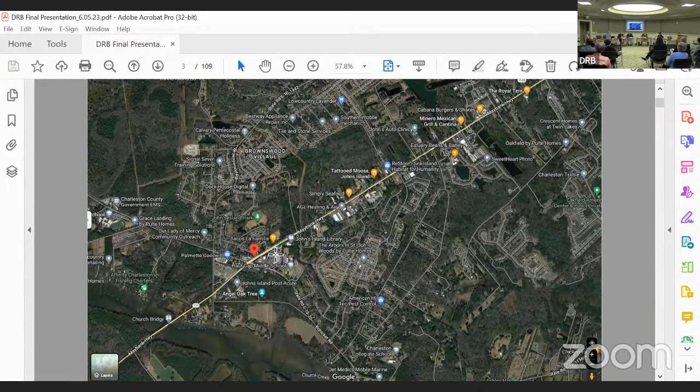Just a few slides, if I could direct your attention to the screen showing the location of the project. Just near the intersection of Main Road and Maybank Highway, 3588, right next to Sunrise Bistro. There's a closer view.

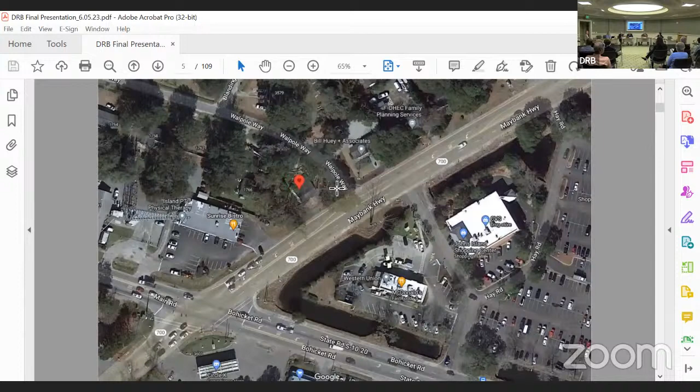A few more images when we actually start the presentation. With that, I'll turn it over to the applicant. You could just briefly speak on it. Oh, okay, all right, you had other slides to show. I was waiting. Yeah, thank David.

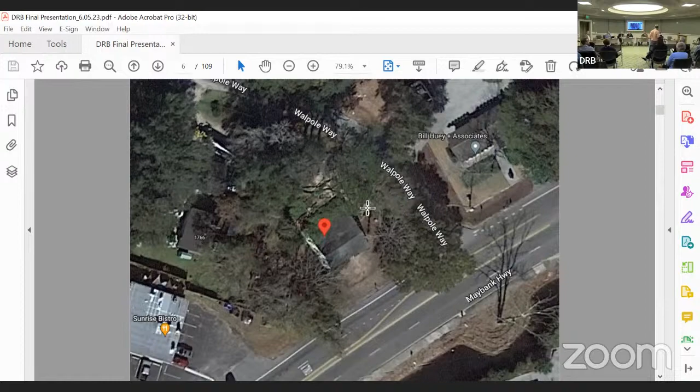I appreciate it. My name is George Grazzi. I live at 2485 Royal Oak Drive on Johns Island. I've lived there since 1990. I bought 3588 Maybank last January at a master of equity sale. It's been unoccupied since 2017. A Vietnamese family approached me about it. It runs a successful chain of nail salons, and that's what they want to put there. They've signed a long-term lease.

If we can get— sorry to interrupt, if you could just keep it to only the demolition and not what you're proposing to do with the building. Okay, thank you. Actually, I don't have a whole lot. So basically, we've been working with Stan Tech, Ron Gessen Architects, and David Hatcher Engineering. We designed the building, and we were trying to maintain the front and the 2 sides. But when we got all the covering taken off, we found out that all the base plates and lower parts of the 2x4s were decayed, and we were trying to build it back better with new materials. I've got my contractor and his foreman here to validate what they found when they began the demolition. We are now dead in the water once again, and we would just appreciate you agreeing to let us build this as planned.

Great. Did I miss anything? Anybody else like to speak on it?

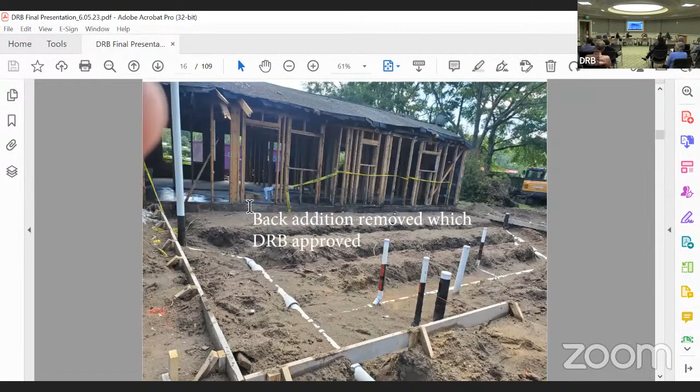And then we'll resend that — some of the exterior materials were removed. And then this back portion to the left was a newer addition, so that did allow the demo of that portion of the building, since it's not — DRB reviewed and approved that addition that was allowed to be removed.

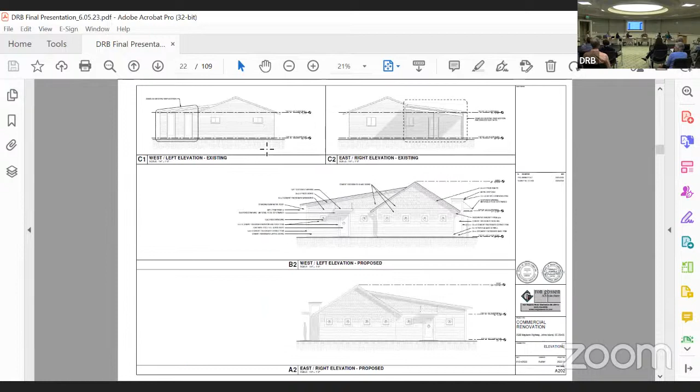Current condition of the house. Are there any questions from the board?

Is there anyone here from the public that would like to speak? Yes, ma'am. Anyone else? Just one? Come on up, please. Yeah, that'd be great.

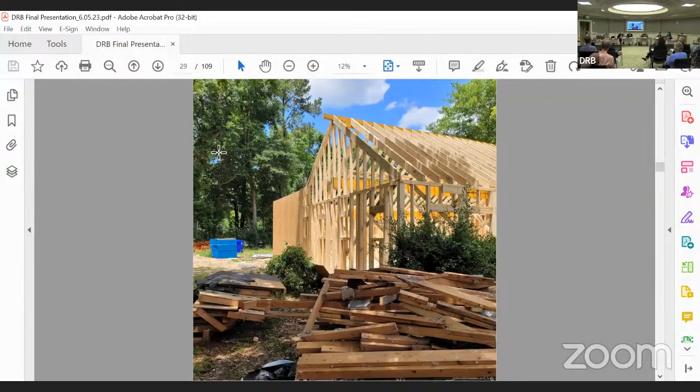So basically, the size of the project falls within the staff review jurisdiction. We would not have seen that coming up. Correct, I forgot to mention that because the renovation was under 3,000 square feet, it was not required to come before the board initially.

And there was, if I remember, based upon the review that I saw, it appeared that notes on demo were somewhat spread throughout the documents. There was no demo plan, as you had indicated as well. And I guess the only other question that I have is, as far as the options of the board, obviously if it's approved, it remains the same. If there's a denial, what are we asking the applicant to do then?

I would ask that we have some advice. I'm sorry, I didn't hear the question. The question was, understanding the results of an approval, but if the application is denied, what are we asking the applicant to do? I don't know, that's why we're asking the attorney. I'm happy to give you some advice on the interpretation of the code in executive session if you'd like to do that.

Can we make a motion to move to executive session? Second. Is there a motion, second? Yes. Any further discussion? Stephanie, do you vote to move to executive session? Ashley, Aaron? Yes. And yes. I'll say yes. We can step out and leave. We'll take a brief moment to enter into executive session and we will return shortly.

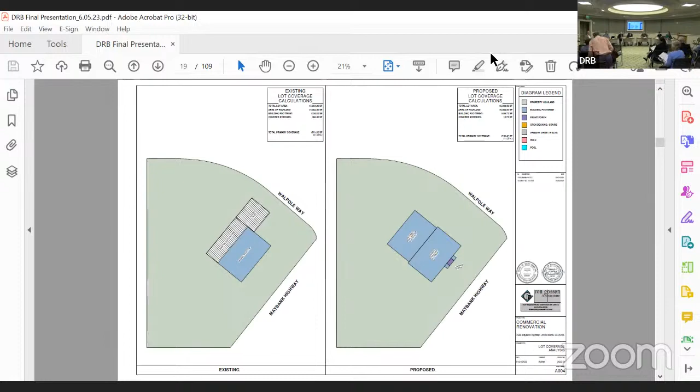Very much. We are moving on to agenda item number 2, 2015 Battery Boulevard, requesting preliminary approval for a new fire station number 23.

Actually, I think we've seen this before. So, turn it over to the applicant, and all set. Thanks, David. Okay, yeah, we'll do that.

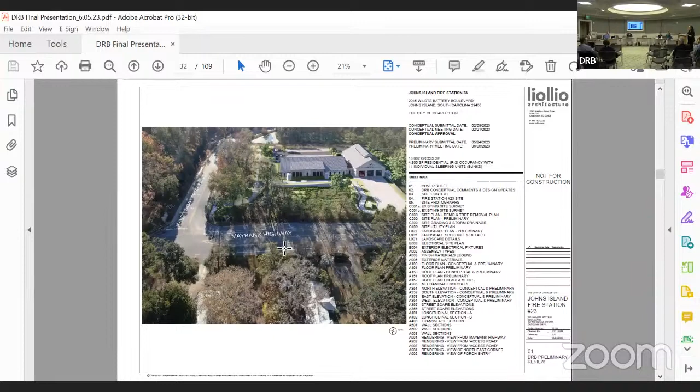It's good to be here in person. When we did the conceptual application, we were in the Zoom room, so we're glad to be back for preliminary. I'm Jennifer Charzuski, I'm a principal with Liollio Architecture. Here with us today is Jeremy Eaton from the design team, David Likey, the landscape architect, to help with questions, and Beth Garland from the City of Charleston as the owner's rep. So we'll go forward, David, to just address — we appreciated the board's thoughtful comments on the conceptual application that really focused on the roof overhangs and achieving more clarity and simplification of that.

And there was some discussion about the brick bonding pattern, which we put our design updates in there to say that we concurred and have simplified and unified the overhangs now on all parts of the building. They're the same depth. We've been able to structure them differently to really maximize the thinness of the roof, minimize the thickness, and to have a consistent language without the exposed rafter tails. And then we'll talk about the brick bonding pattern, I think, as we go through the renderings.

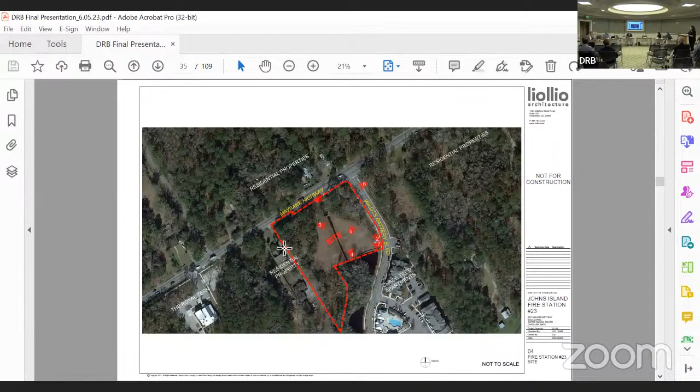So we'll just move quickly through this since you've seen it before, but it's on Johns Island with Maybank Highway frontage next, and there is an existing drainage pattern running through the site. The site clearing, some tree removal, and wetlands remediation was done as part of the PUD prior to the city purchasing the property. There are some photos which are unchanged from conceptual.

I think just one thing to point out to reorient everyone to the site plan: the building has frontage on Maybank Highway, and that's where the emergency apparatus exit will be out of the fire station bay. The rest of the frontage is a protected wetland area, so the building is set back behind that. And the building really has two fronts, because to the south of the building, as part of this project, will be a public access easement to help set up for the future of a public street. And that is where the pedestrian and vehicular entries will come from to the building.

Stormwater is a challenge, of course, so we'll make use of subsurface stormwater storage both beneath the parking lot and on the east side of the site, as well as some pretty visible large-scale cisterns for pulling water off of the roofs.

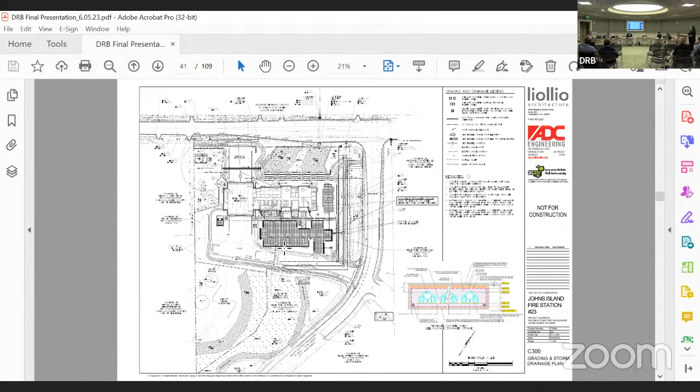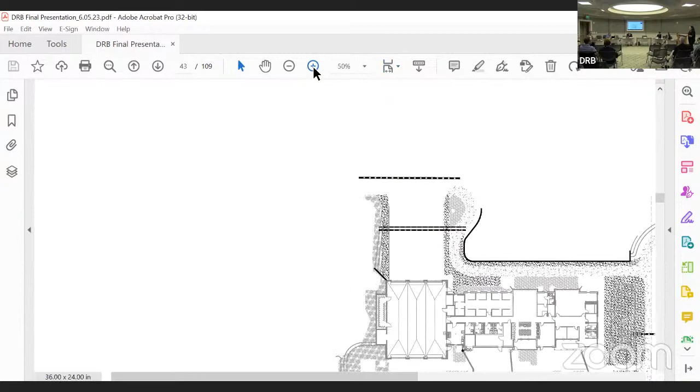There you see the diagrams for the subsurface storage, and I guess we'll maybe just skip to the landscape plan. There is a tree mitigation diagram in the package as well. The tree mitigation is going to be a combination of on-site plantings as well as paying into the tree bank, just due to the constraints of the site. I think just the note we wanted to make on landscape is that obviously that large tree, it's a 111 DBH combination, is a significant feature of the site, as well as the wetlands on the frontage. It's really part of the character of Maybank Highway and being preserved.

The landscaping going in as part of this project is meant by design to be simple and clean, setting it up for success. As you may or may not know, the firefighters themselves maintain their site, the City Parks Department does not do that. So really working to have simple bed lines, consolidated turf areas, durable plants that can be kept organized, knowing that reality.

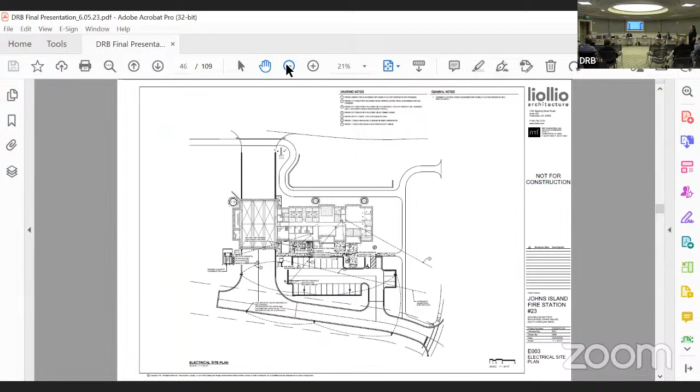There is a site electrical plan. The site lighting will be leased by Berkeley Electric, but the photometrics will be available at a future date once they've done their design. But we did highlight the building mounted exterior fixture, just looking for something very simple and quiet.

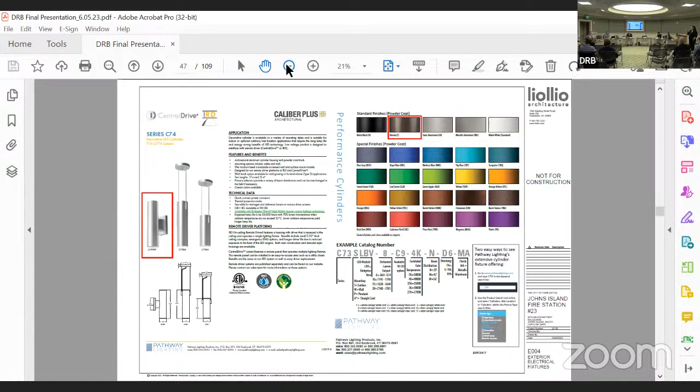We included in the package the wall and roof assemblies, but what they show is the exterior veneer is all brick, and the roof is predominantly, if you go forward, standing seam metal roof with an area of low slope membrane roof. We included the finish legend to help key back to the elevations. These are the same materials that you saw at conceptual, and we have the physical box here if you want to see them in person.

Now that we're in person, the field brick is in the upper left, and it's a gray body brick with a white slurry coating on it. The accent brick is the darker one, so it's the same body color but without the white slurry. The use of wood is very specific and limited to the framing around the screen porch and a mechanical screen enclosure. I think we're still selecting mortar colors, and then the storefront and painted steel accents are a dark bronze color.

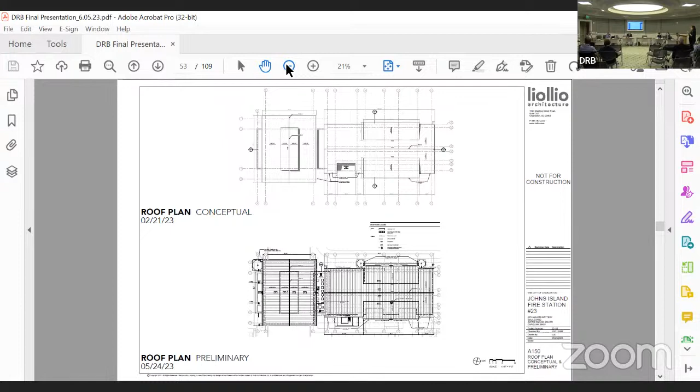You can see that the hyphen roof does have small condensing units. These are residential scale kind of split system units, and there is a mechanical screen wall shown for both of those on the roof. You can also see here the 3 large cisterns that front Maybank Highway.

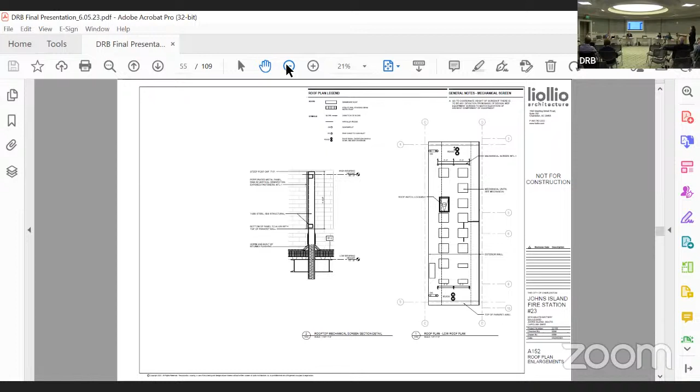Screen wall details: the hyphen roof screen is a perforated rimmed panel, and the at-grade screen wall is wood.

I think all that's left are the building elevations. We have previous and new, so other than turning off the sun and removing the shadows, the only change you see here is in the cisterns, where we went from one large one to two, to really just pick up the roof areas better. On the next elevation, you see the change in cleaning up the roof line for that mechanical purpose, but no other significant changes.

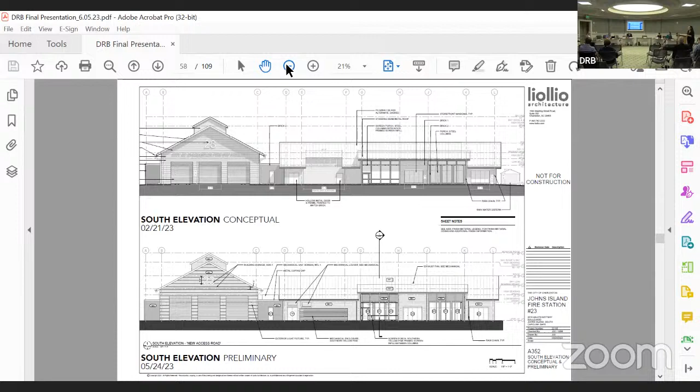And on the east and west, we'll click through the streetscape elevations and come back to those if there's any questions.

The building sections, for reference, there was a question about the conceptual light monitor translating to the inside of the apparatus bay, which it will do. After those, we'll click through these.

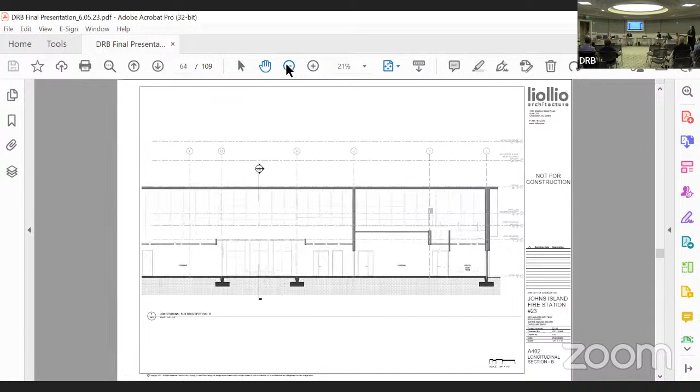Keep going. The wall sections will show the brick veneer and the square cut overhang detail, and the way we're changing the structure to really get it as thin as possible. I think it's a 6-inch thickness, and it's a 30-inch overhang.

At the apparatus bay, we're doing the shadow line every 9th course, I think. When you saw it at conceptual, it was every 6th course — it was denser, and there was a request by the board to study the coursing between the two buildings. So we wanted to provide clarity that all the light colored brick is the garden bond coursing. It's the same coursing, but it's only the apparatus bay with the shadow line protrusion. That came from a desire from city leadership to have a distinguishing feature. When we studied adding it to the other building, it was really busy since that building has a different scale of things happening on it.

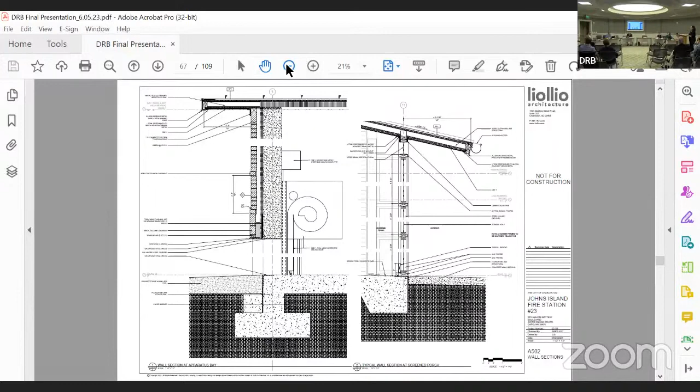So with that, I think we can click through elevations to the rendering. So the point we made again at conceptual is all the vegetation in the wetlands is not shown here for clarity — just the one grand tree is — but obviously it's very densely vegetated.

The public way sidewalk comes around the sign. That was made a little more gracious and curvilinear based on input from the mayor's office.

This is the other front of the building. It has two fronts, so we think that cleaning up the roof line helps focus on the pop out, which is the screen porch and the public entry.

And then there is a bid alternate for a photovoltaic array, and sadly it probably won't be that big because there are some limits, especially electric, on how much capacity you have. I'm willing to show that as a possibility.

And then you see here the way the cisterns are connecting to the two roof lines, and you can kind of see the expression of the garden bond pattern, as well as the low retaining wall between the sidewalk and the wetlands.

And then lastly, we've simplified some of the structural detailing at the entry, and you can also see the use of rain chains on the south side of the building. That was less than 10 minutes. I'm happy to answer questions.

Thank you. Are there any questions?

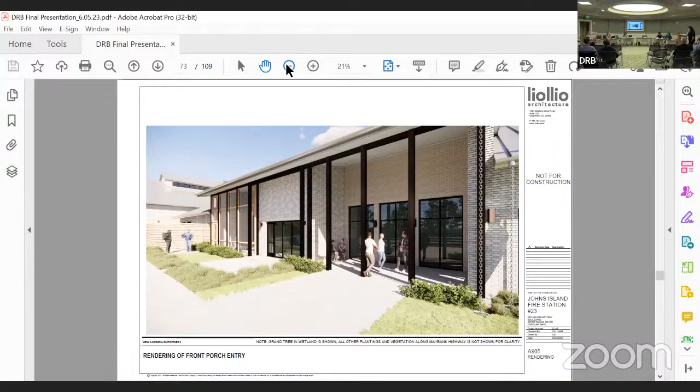I have a couple questions, and I wasn't here for the conceptual review, so apologies — I'm catching up a little bit. But in that front area, I see where the wetland is, and then there's the large wetland buffer area. Is that also remaining undisturbed from a landscape perspective? Yes. Okay, so just keeping the existing plants.

And then the retaining wall that runs along the back of that, what material is that proposed to be? Proposed to be cast in place concrete. Okay.

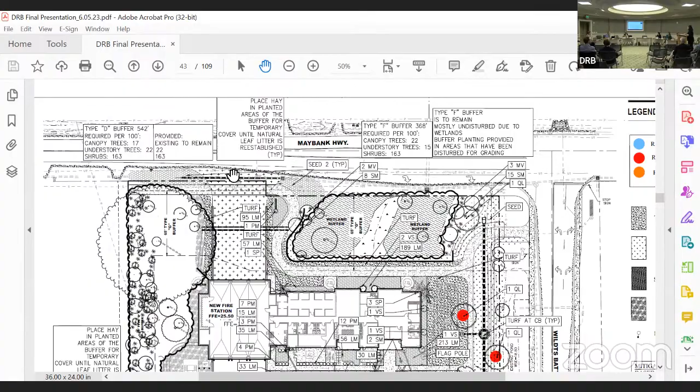And the last question I had about the landscape plan, where you have what looks like a large generator and something else in there, I can't read the note. It's just labeled as exposed mulch in that whole area. Is that the intention, that it's not going to be planted? Just an open mulched area?

Yeah, there's a note about letting the forest floor litter return, putting in some mulching until that has a chance to return. But David has a better answer. That was the design intent.

But even in the area where there aren't any trees or anything proposed? As far as the generator, just around that, there's a large area that's just labeled as exposed mulch. Yeah, we've gone back and forth on that. There's going to be a lot of activity around the backside of that. We want to screen, of course, toward the other front of the building, but felt that it's backdropped by the existing vegetation, and really didn't require that.

Yeah, you hit the nail on the head with the access. They really need access to all sides of the generator. They have to do regular testing. They store diesel fuel in the tank, so they also draw on that in emergencies as well as for regular maintenance. So planting can kind of get trampled.

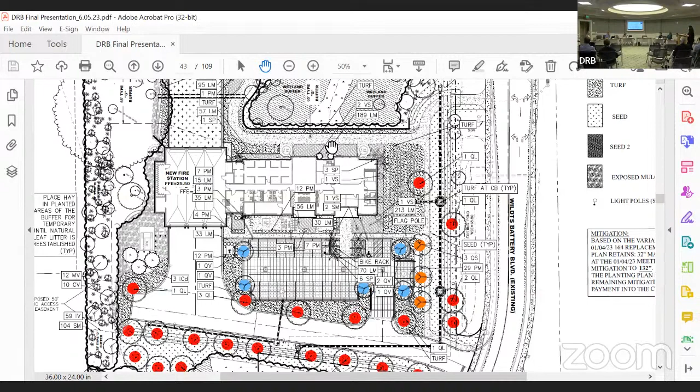Any additional questions? I had one question. The mechanical well, I know that it's come out outside of the building. Is that because stuff couldn't fit in there, the mechanical equipment couldn't fit in?

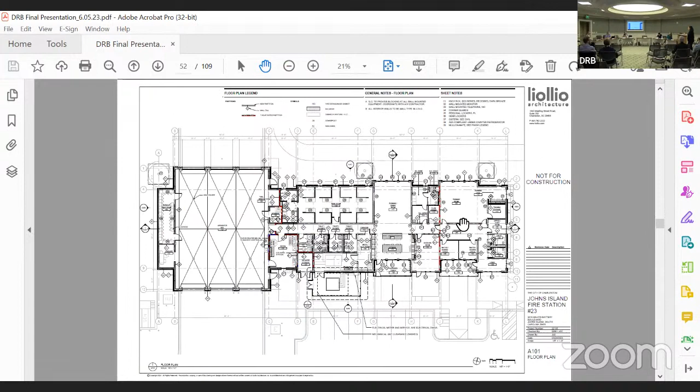It's both, yeah. The dedicated outdoor air unit was too big to go on the roof, and we ended up splitting it partially because it would have been a much bigger screened enclosure. But by putting the air handling part in the building, it extends the life of it, and we don't have ductwork going into the building, so we're able to keep just the condensing unit outside.

But the condensing unit for that dedicated outdoor air unit is big. And we looked at a lot of places on site, and there's no other good spot. It just feels right there. So we tried to make it kind of a quiet bed. Felt that it was quieter this way, but it wouldn't have fit in the recessed option because that would have been the whole unit.

Any additional questions?

Is there anyone here from the public that would like to speak on this application? With none, David, staff comments, please. Thank you.

Staff comments have been addressed since the last board meeting. One staff comment: the city planning department is still wanting to see an additional sidewalk or boardwalk along Maybank Highway. The applicants have stated that the city will not pay for the walk, and that would need to encroach into the wetland a few feet. Staff recommends that the walk still be installed. I was asked to put this comment in to see if we can get any additional consideration, hoping that the city may change their mind and pay for that sidewalk. So that's all I have for staff comments.

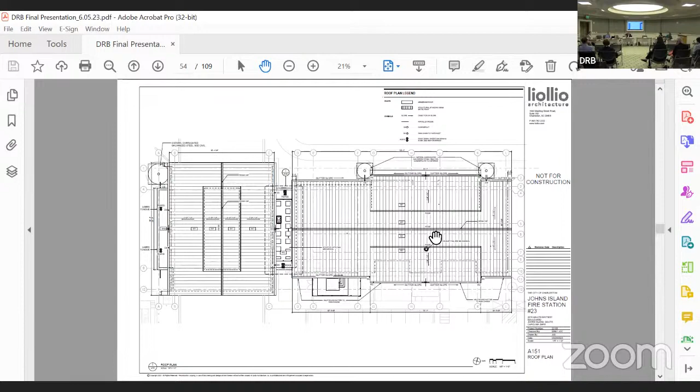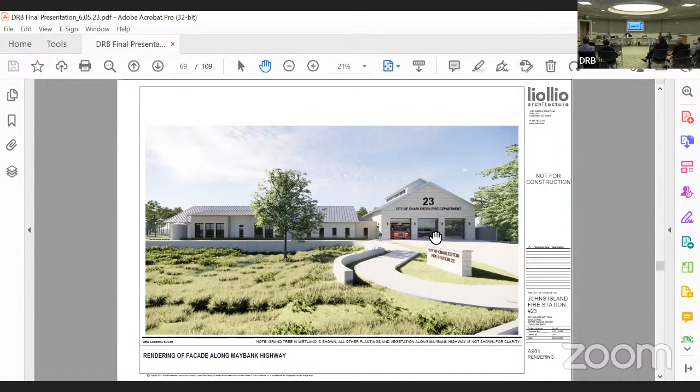My only comment, architecturally, I think it's a beautiful building. Height, scale, mass, we know that fits in, but I'll applaud you. I think the quality of the presentation at this stage is what I'd like to see in a lot of these. The only negative is that mechanical screen. To me it kind of ruins the screen porch idea, because you're right next to a mechanical screen with mechanical units in it, and you've got a screen porch right next to it. But I understand why you did that. Architecturally, I see nothing else to comment on.

I have a staff comment or architectural comment: I think it'd be a great addition to the site. As far as the sidewalk, I think the sidewalk is fine. But that's my only comment.

Additional comment to add? No, I would not add. I did have one quick question before we make a motion: where are you in the TRC process? I can see that the sidewalk is maybe unresolved with the city and TRC. We've done a TRC pre-application a while ago, and we're due to make the TRC first submittal in a few weeks, because we're at the early CD stage of the project.

Any other questions or motion? I'll make a motion for preliminary approval, with board comment to study the area specifically around the generator, soften that landscape approach, study areas with turf, seed, and mulch, and study loosening the landscape design approach overall. Does that sound right? Are you going to ask staff to comment? I was not going to.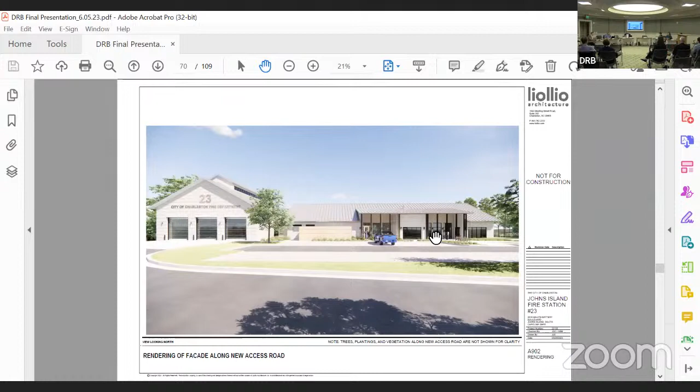I'll second the motion. We have a motion for preliminary approval with board comments: one, study the area around the generator to soften the landscape approach; two, study areas with turf, seed, and mulch; three, study loosening the overall landscape approach. Is there a second? Second. Any further discussion? Stephanie? Yes. Ashley? Yes. And I'm also yes in favor. Thank you.

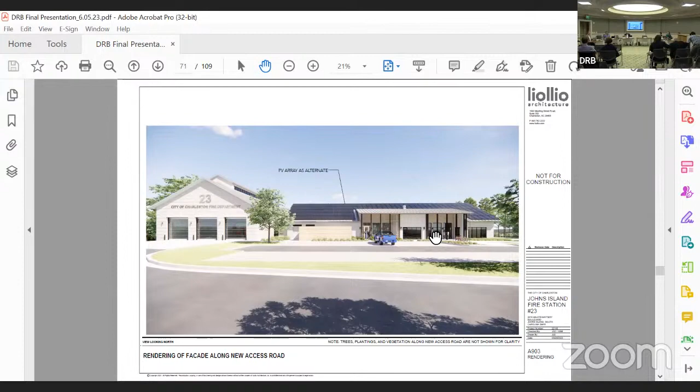We will now move on to agenda item number 3, 1859 Sam Rittenberg Boulevard, requesting conceptual approval for a new Tommy's Car Wash.

I've got just a few context slides first. If I could direct your attention to the screen, showing you the location of the project. Do we need to grab Dino's and Andy? Oh, yeah. Good night. Night. Thank you.

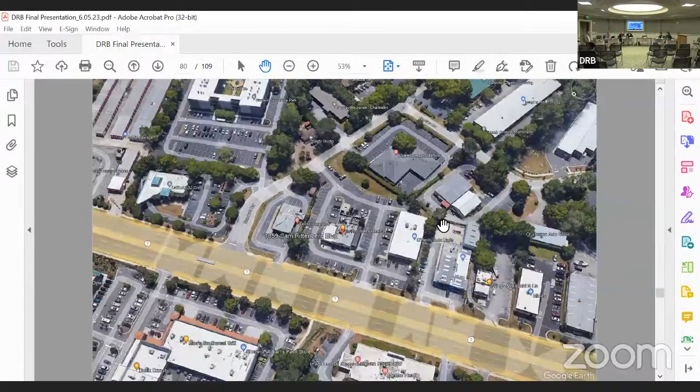Good evening, thanks everyone for your time. My name is Paul Waller, I'm with Bowman Consulting, civil engineering firm on this project. Also introducing some of the ownership team and the Tommy's corporate team to dive into more of the specifics. My goal is to go through the first couple slides of our submittal package, hit the site existing conditions, site and landscape, and then turn it over to the ownership team to dive into the specifics of the building, given the car wash use. The building is a big component of it, so let them take over that part. Yeah, we can go ahead. Let me know when you go ahead to the next one.

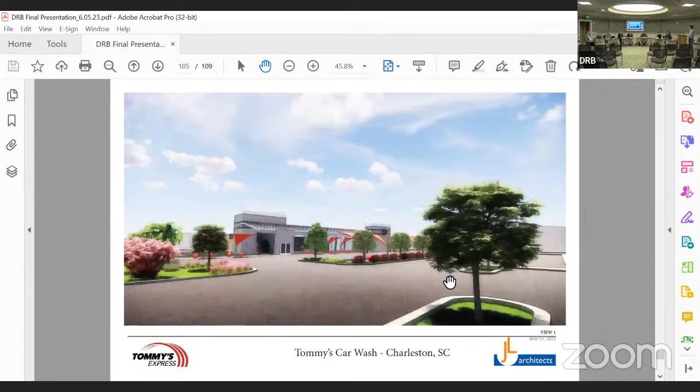The architect is not here, the designer, okay. Yeah, so the architect of record is not here. But I can speak to some of the elements of the elevations, just very briefly. I'm sorry, go right ahead.

We've been meeting with staff, I'd say probably for the last 6 to 9 months on this project, and we've had a lot of iterations. What we presented in this submittal package is a full brick building with a lighter gray. The colors have changed quite a bit over this one. That's something we feel we've been able to focus on.

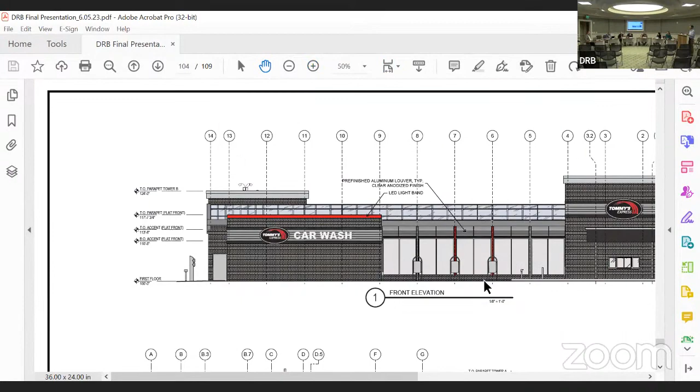Are the colors for this, given the car wash use, just the system of it? The colors along the front - they are a lot more grayscale than this one. There's typically...

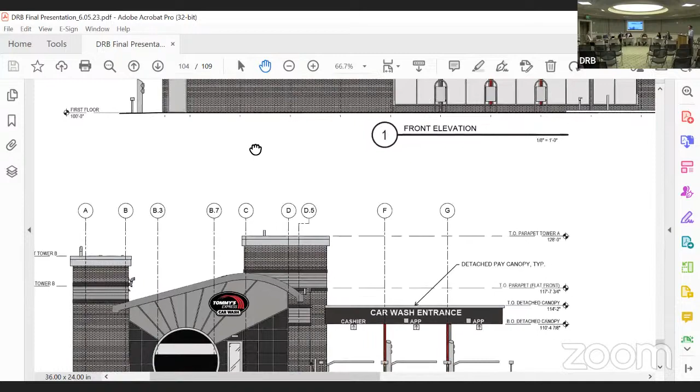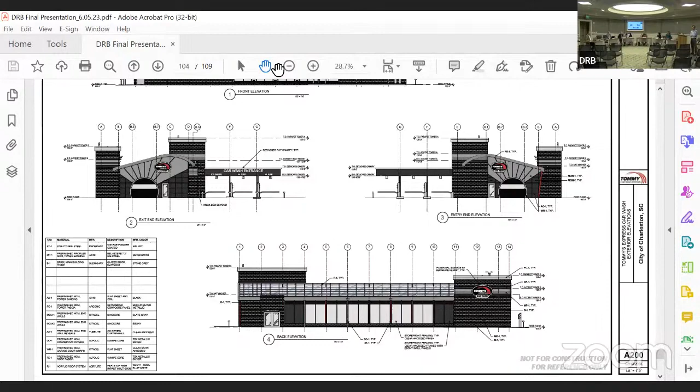I'm happy to talk to you. Are you familiar with the West Ashley Revitalization Commission's recommendations as far as the evolution of design in the West Ashley area? Okay, is this a prototype? Yes, it's not - this has been revised specific for this project.

And when I ask that question, I mean as far as the design, the elevations, and everything - this is different than anything that y'all have basically done, is what you're telling me.

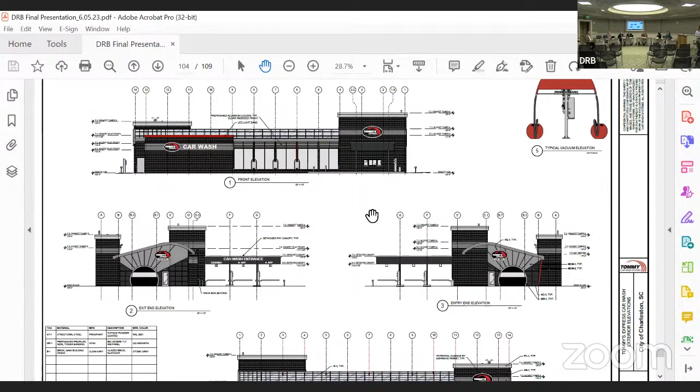As far as like, there's some things in the facility that have - like where a cashier stands, it's on the right side, it's like a pay window. That's where the cashier works from, so that area of proximity has to be by the loading area of the car wash. On the left side, you see this chunk. I don't think he means from an operational standpoint, but from an architectural standpoint, building design - that's what I was asking.

Does this look like the one in Michigan or whatever other location you're asking about? Yeah, substantially customized - we've never done this particular exterior elevation.

This was designed by the local team to meet your local feel. Could you maybe point out to us some of the changes that were made based on the context, or how you responded to the local context? I just think that would help us understand.

This has been something we try to do in all of our markets. There are certain operational standards that are design standards - as far as the actual facade and some of the materials used, we can adapt those. But as far as the look of the footprint of the building, that's the tunnel, right? The way the curb and lane is built is for safety for our employees and customers, so we don't want to mess with those things. As far as the facade, as Paul mentioned, we've been doing this stuff about 10 months now with David and the team. This is the basic footprint we've done before with different materials - completely different materials. We've also workshopped a completely different idea that's really never been done. If you want to see that as well, we can show you that.

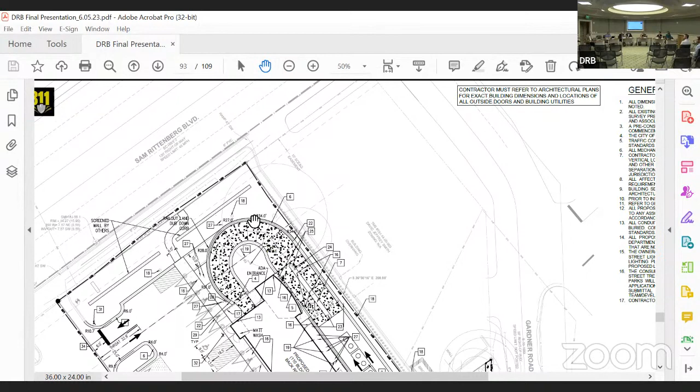Staff comment number 3, the drive aisle that is close to the large 34-inch caliper gum tree is in the drip line of the tree and will need to be shifted so it no longer is in that drip line. I spoke with Eric Schultz at TRC this morning, and he has relayed to the applicant the need to move this drive. So this is the gum tree right here, you can see the trunk, and how close the curb is. Currently this tree is within its own island. Eric said he's giving instructions to the applicant about removing the asphalt around it, creating space for that particular tree. So that will need to be shifted for TRC.

But unfortunately, staff does recommend denial. Staff cannot support this. Thanks, David.

Does the applicant team have anything they'd like to respond to or clarify?

One thing I would like to mention, I'm not sure how familiar you are with this process, but we are simply voting on the design. We're not voting, and we have no say or opinion over the use. So it's not that we don't support the project, it's purely a design standpoint, just to make that clear. But if you have anything you'd like to clarify or respond to, by all means, this is your time.

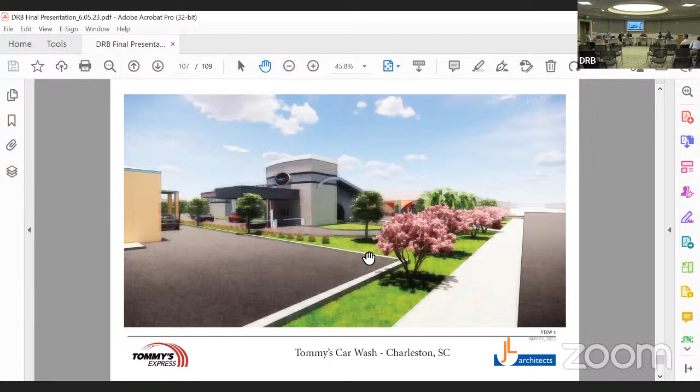Sure. I'll respond to a couple of the site elements that David spoke about.

So the screen wall, we are proposing that as part of this project. We just called it out on the screen wall right now. Our thought was that we would figure out the material through this process, figure out what the building actually looks like, and then present that detail as part of a subsequent submittal.

And then the circulation comment - David, do you want to pull up the site plan to talk through those 3 driveways. There's one existing access on Sam Rittenberg Boulevard that we will be utilizing, and there's an existing access on Gardner Road that ties into DOT right of way. Then interior of the site, there are 2 access points at the back of the installer area to essentially get customers in and out.

And yes, we are working with TRC staff. We've been through 2 rounds of comments with TRC, and the latest landscape comments did identify this week an issue on the northeast property line. Our arborist, Luker, had identified it as a grand tree, so we are looking into that with the tree and trying to see if it's safe. But that is something we are looking into.

And I would just say too, we also wanted to brainstorm. We know the prototype is a big issue, so we wanted some thoughts on how to de-prototype it. As you know, there are certain restrictions that we're under, but we think especially for this stretch of highway, this will be about a $6 million project and improvement to the area.

The building's built to be LEED certified. We reclaim the majority of the water that we use. It's a really expensive project, especially for that area, that will greatly beautify that stretch of highway. So we want to make sure we're doing it in a way that we can get support. But what's difficult is the prototype is kind of a subjective term, so we'd love to get some feedback from you all on how we can make this not a prototype and something you'd be able to more actively support.

I have a question. Have you studied any of the other car washes in the West Ashley area, and what the prototype was comparatively speaking to what was designed, permitted, and built? More than the recent ones, obviously.

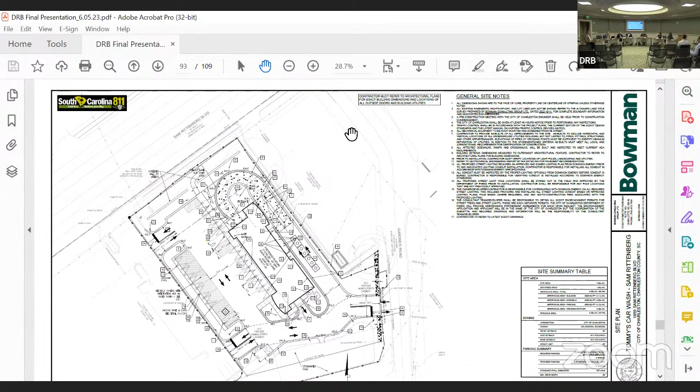I think too, if the architecture is reconsidered the way that we're asking and expecting, I think that's going to have implications for the site. It may change the footprint, it may change some of the sizing, it may change some orientation. So I think saying to keep the site plan is shoehorning them too much into that, whereas the change we would want to see is so different that it's going to inherently change the site plan as well. The building might be too big for that site.

Once you get your architect involved to look at it - and we've referenced some projects, you may want to talk to staff about who did those projects. They've been through this process.

I think that from the standpoint of the material selection, you've really created some very nice, high-quality materials in regards to the elevation. I think what I'm struggling with personally is - generations of ownership is just huge, and I certainly can appreciate that as well. The building is a little too stylized.

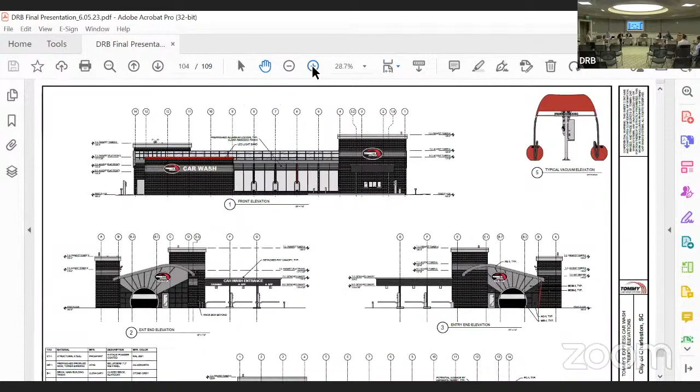It needs to be - and I'm not saying that you necessarily - it just needs to be reevaluated in terms of its context to the area. If you really get into the heart of what West Ashley, and Ashley can respond to this better than I can, but when you get into the heart of what WARC, the West Ashley Revitalization Commission, is looking for, it's creating a sense of architecture that is first of all contextual, that has a presence about itself that speaks to the Charleston area and to the West Ashley area. It's also looking to create an additional springboard to other inspirational architecture that comes along. And when you become too stylized in an approach, you have somewhat encapsulated a design that's going to struggle to have any relationship with anything else around it.

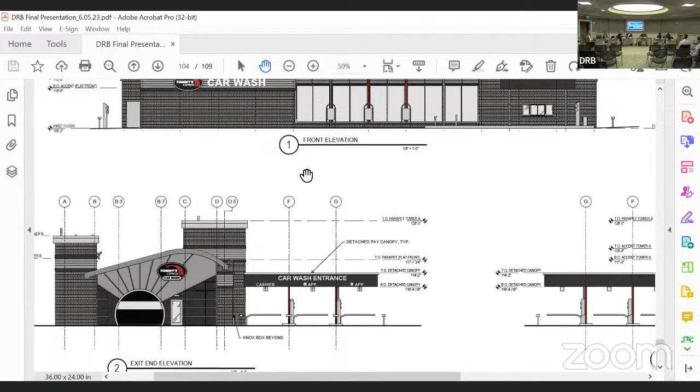So when you look at this, you've got linear structures that are working, and then all of a sudden they're two very common linear structures volume-wise, and then there's this very different texture or treatment to what's happening in between. That's where I'm struggling with how it's being presented. I do believe there are solutions within the context architecturally. Ben, you can talk more about this, but I think that-

If you tell your architect - first of all I would tell you, as our chairperson Erica was saying, it's so helpful from our standpoint to have the author of the design with us. I think it would expedite the process as we go forward. And Paul, not that you aren't phenomenally talented in design, but I've learned I don't touch civil engineering, I just don't understand it. So the design professional would be a huge asset as we go forward to help expedite the review process.

But again, one of the things I didn't see in the application - aren't we supposed to have streetscapes? Did I miss that? I'm talking about with the building. There was a couple of simple ones, yeah. Obviously missed that one. Thank you.

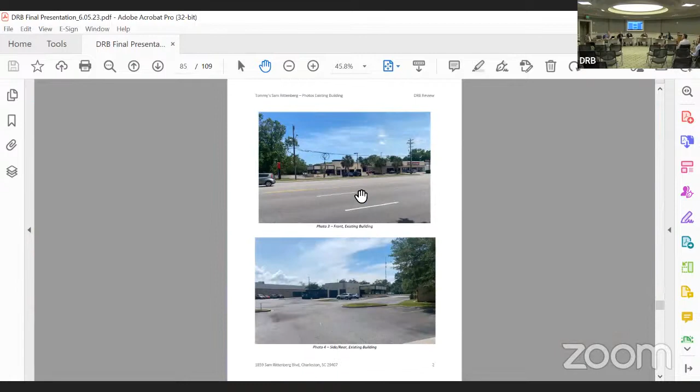Oh, there it is. Yeah, is that it? Yes. It would help to have a little bit more context in that regard, if it's a question, or specific to the architect or to the streetscape.

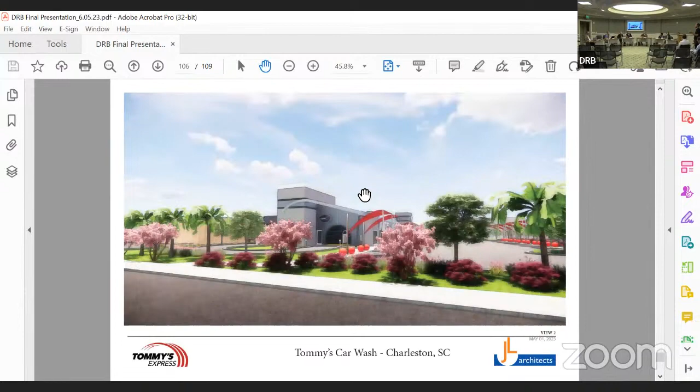We're happy to answer those, because technically we are also the designer, so we are the architect. We draw the drawings, but my father's the artist of the team and creates these. We've themed them in many different ways, and we're very open to cater to that. We have another concept that we've achieved in many cities around the country. So any questions you have, I can answer.

Well, that would be one of the things I would go back and explore. You're starting with some familiar forms, but then all of a sudden it dissolves into an entirely foreign form to the area, and you want to go back and reevaluate that. I think contextually, providing a real strong springboard as far as the architecture is concerned.

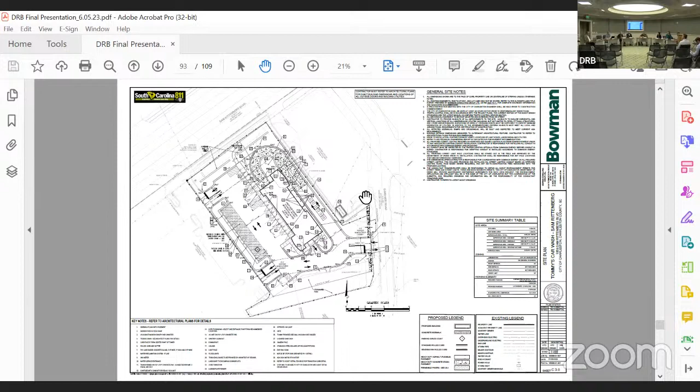And what's the one up on Sam Rittenberg? Time to Shine does have an outlet that faces, but they did it in a very nice, simple and clean way, without a lot of fanfare, without a lot of celebration. It's just very clean and simple. And those would be my suggestions.

Well, you have a designer here would be helpful - one on Sam Rittenberg, and conversely the one over on... there's the two Time to Shines that are very different. Yeah, we're not pushing in one direction. We're kind of looking to y'all to bring us a solution.

And I would think outside of just materiality. Materials are good, but think of form, mass - what is the mass, how are you expressing that mass to the street and to the side alley, and not just keeping the same floor plan, but looking at the site and seeing how it works with the site and the landscaping.

Based on everything that we've said, I would move for denial. Any comments? It just demands a restudy, so a motion for denial. Is there a second? Thank you, Andy.

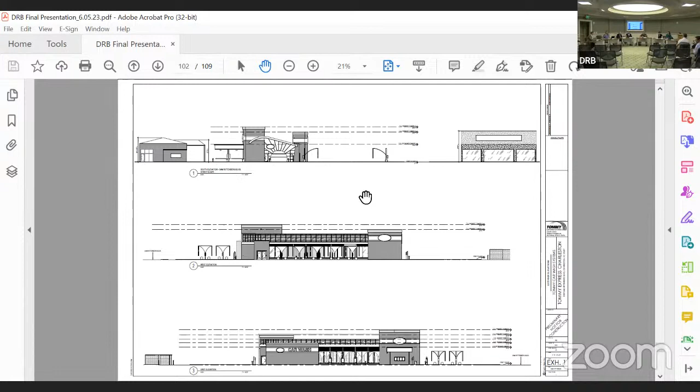Next on the agenda is approval of minutes from the May 15th, 2023 meeting. Question about that - the motion is recorded accurately, but without the comments specifically. Do we have to have those in there?

We had staff comments 2 and 3, and then we had 5 board comments. Maybe they should be listed separately with the motion, or is it okay for them to be in discussion format? Because it was part of the motion, they need to be listed as part of the motion.

We can just table the minutes and approve them next month. I'm still not sure what the problem is. I can show you - there was discussion on comments made. Okay, so let's make a motion to defer.

Is there a motion to defer the minutes until they can be clarified? Thank you, is there a second? Thank you, Ashley. Any further discussion? I'll call roll. Stephanie? Yes. Erin? Yes. Ben? Yes. Yes, I'm also yes. We're done.